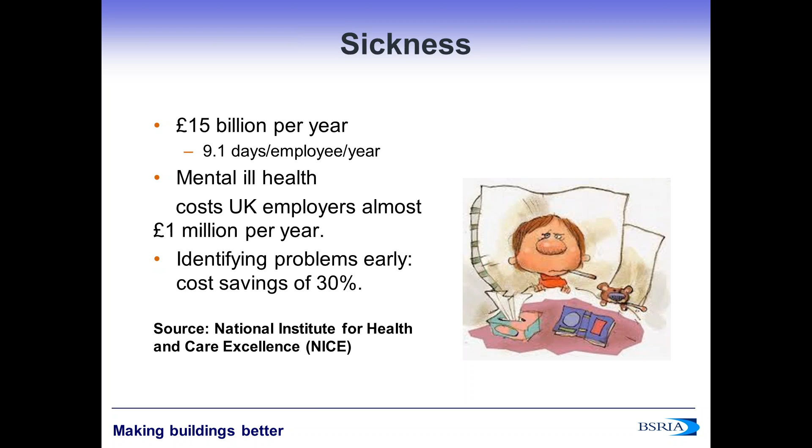From a construction point of view, well-being translates into creating buildings that provide the right environment for ensuring the well-being of its occupants. When we take into account people, building, and the environment inside the building, then we are talking about indoor environmental quality. IEQ, or well-being, should be in our minds at all the stages of a building, from design stage to construction to the maintenance stage of a building.

Although it's hard to quantify the economic impact for employers, it is easy to establish that the quality of a building can have a huge impact on the health and well-being of occupants. Now, when it comes to indoor environmental quality, we're talking about 5 main components, which are thermal comfort, light, indoor air quality, and odours, which also tend to go together, and sound comfort.

Let's start with light. Just as a brief reminder, when we have a source of light, the amount of light that it produces is measured in lumens, and this is called the luminous flux. The amount of lumens that hit a surface is called the illuminance, and illuminance is what we normally measure in a building, or what is normally in a building contract.

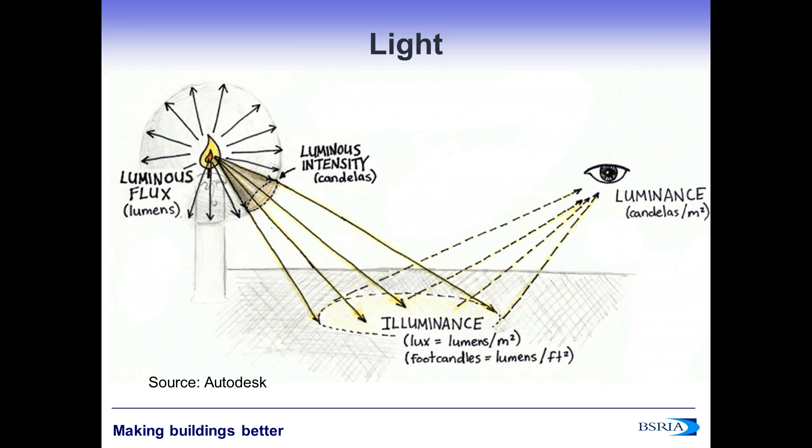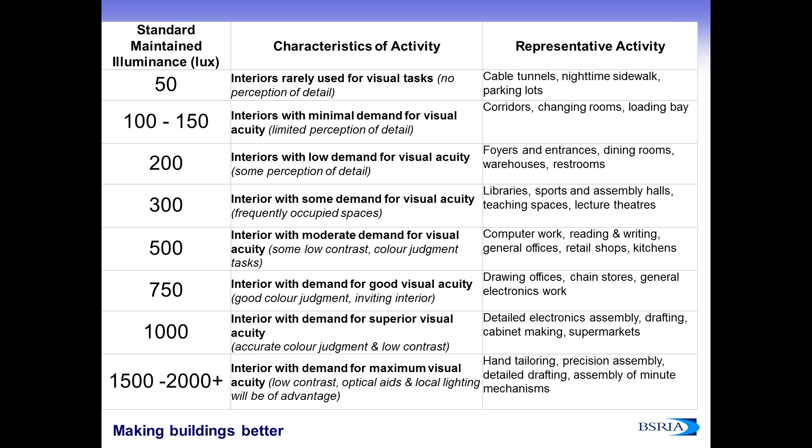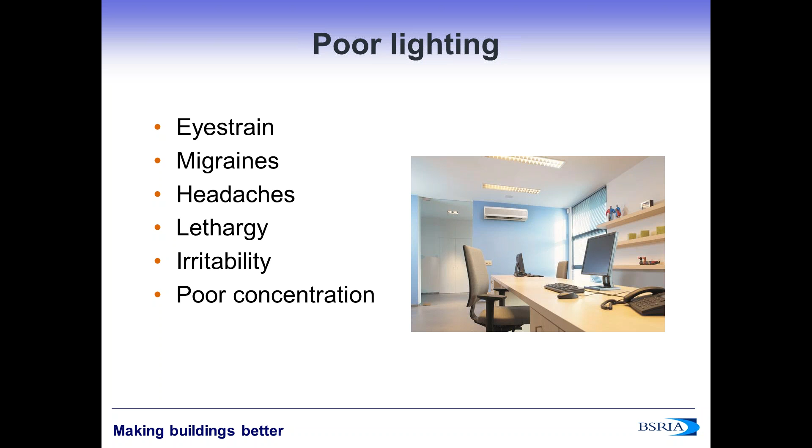Now, we all know what happens when we have to work with poor light. We might get headaches, we get irritable, and we cannot concentrate on the task that we're doing. So how does this affect our performance? Now, it's not only important to provide the right amount of lux, the right amount of illuminance. Good lighting with lack of glare, for example, is indispensable for occupants to be productive.

Some studies have also linked daylight, windows and views to increased levels of productivity. And we can also use light to our advantage, knowing that some types of light, such as blue light, make us more alert, and dim lights can make us more creative.

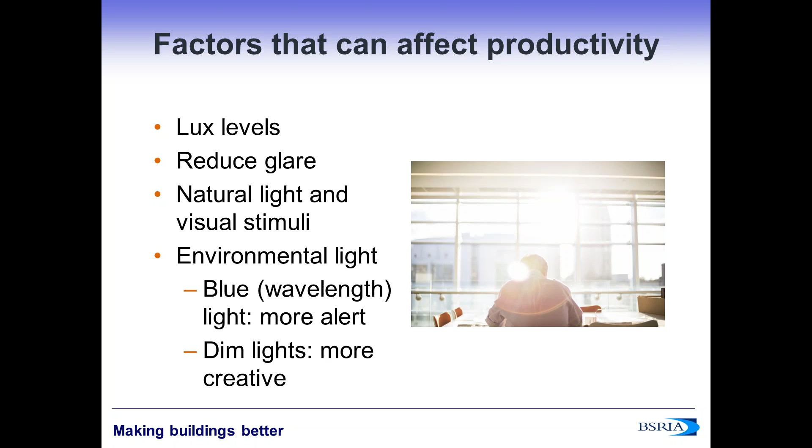Now, the next component of indoor environmental quality that we're going to talk about is sound comfort. I'm not going to talk in depth about sound, as my colleague Rebecca Hogg is already giving a presentation about sound on the 1st of March, which you can find online. And she is our acoustic expert. But very briefly, we can define sound as any air pressure variation that the human ear can detect, and noise as any unwanted sound.

Now, designing for the right noise levels can improve the satisfaction of the employees. High noise levels and vibration will result in a really uncomfortable environment. It can also cause hearing damage or stress, it can affect our motivation, and it can also be very distracting. On the other hand, very low noise levels, for example in an office, have an effect on our speech

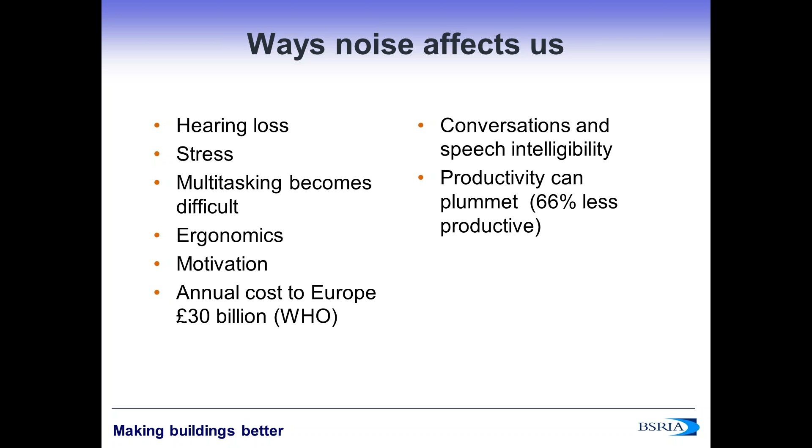privacy. In fact, in an office environment, we are not normally subjected to very high noise levels. But what distracts us is the fact that we can hear and understand other people's conversations, whether we want to or not.

And actually, the ISO standard 3382 defines two acoustic parameters, which are defined as distances. The first one is the privacy distance, which is the distance at which a conversation can no longer be understood. And the second one is the distraction distance, which is the distance where speech is only intelligible just a little, but it mostly contributes to the background noise.

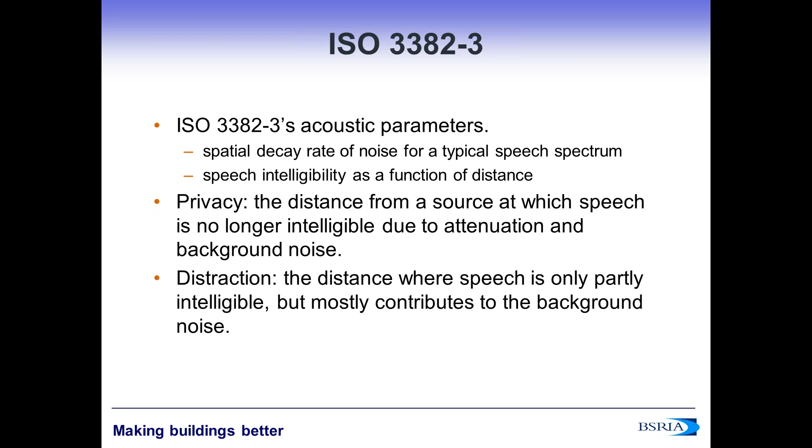Now, the next point that I'm going to talk about is thermal comfort. Thermal comfort does not only consist of measuring temperature and humidity levels and ensuring that they are in the adequate range of values. There are several standards; for example, in America, ASHRAE 55 is quite popular for measuring thermal comfort. But in the UK, BS EN ISO 7730 is the one that we normally use. And the other standard, 7726, refers to the instrumentation that we use for measuring thermal comfort.

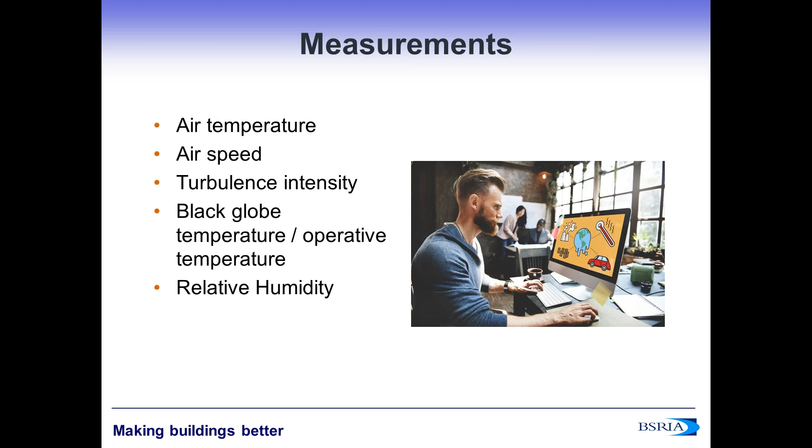For the measurements that we have to take for measuring thermal comfort, as I said before, they are not only temperature and humidity, but we also have to measure airspeed, turbulence intensity, and either black globe temperature or operative temperature. Here you can see some equipment that BSRIA uses for measuring thermal comfort. So here, for example, you have an anemometer, which measures the airspeed and also air temperature. Here you have a black globe, and here you have a humidity sensor.

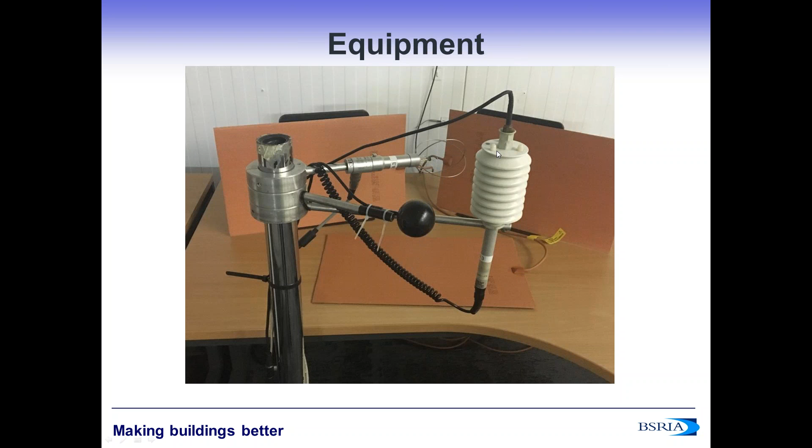Now, the standard takes into account all these parameters that we have measured, but it also takes into account the clothing levels and the metabolic rate. So the clothing levels will be different depending on the layers of clothes that we have. And the metabolic rate refers to the activity that we are doing. So for example, if we are designing a space for a gym, people there will probably be running or exercising, and their metabolic rate will be higher. So we have to take this into account.

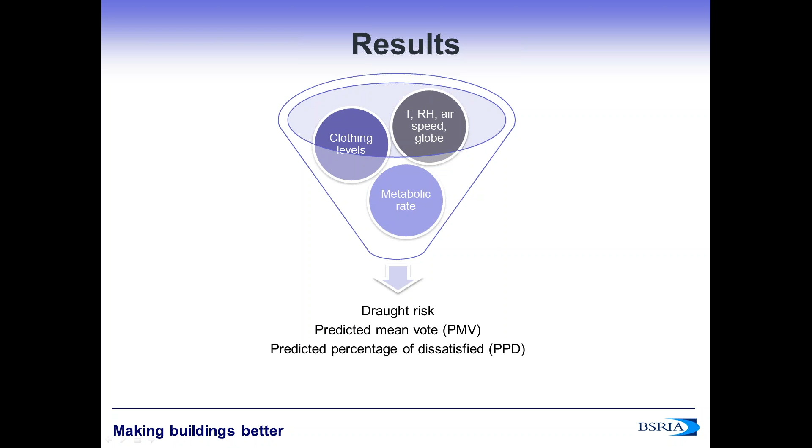And then with these three factors, we can calculate the draught risk, which is a percentage. It gives you the percentage of people that are going to be bothered by draught. The predicted mean vote and the predicted percentage of dissatisfied, I'm going to explain to you in the next slide.

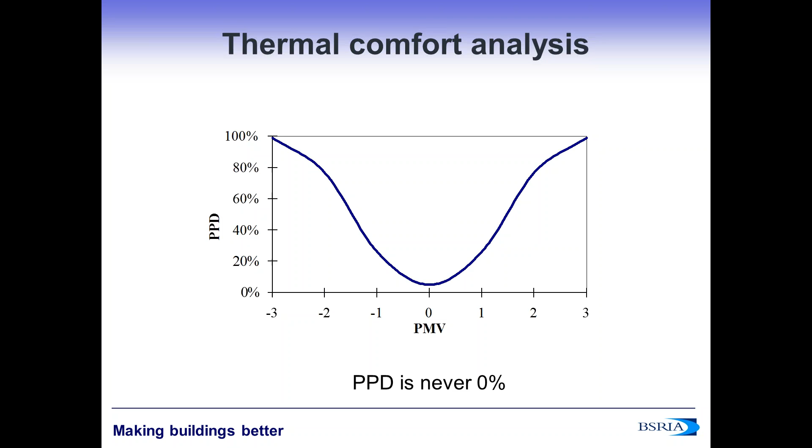Annex A of the standard 7730 that I mentioned before categorizes the buildings or the spaces depending on the results of the predicted percentage of dissatisfied people, the predicted mean vote, and the draught risk, as you can see there.

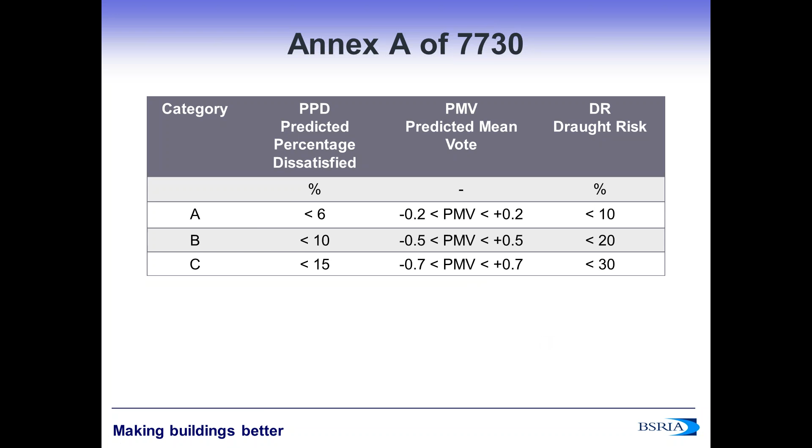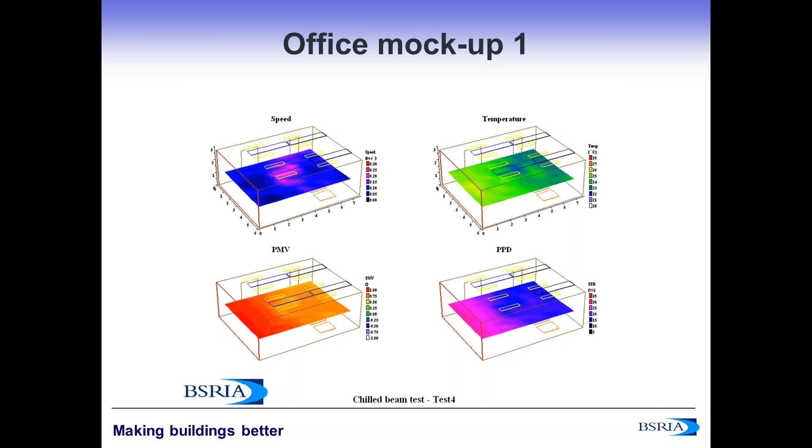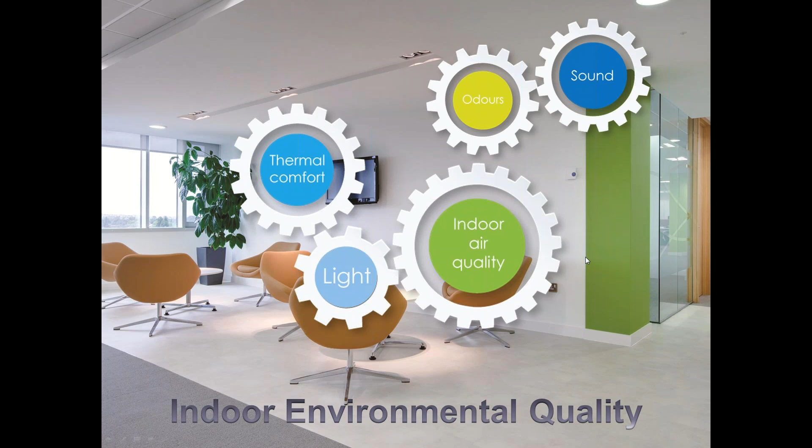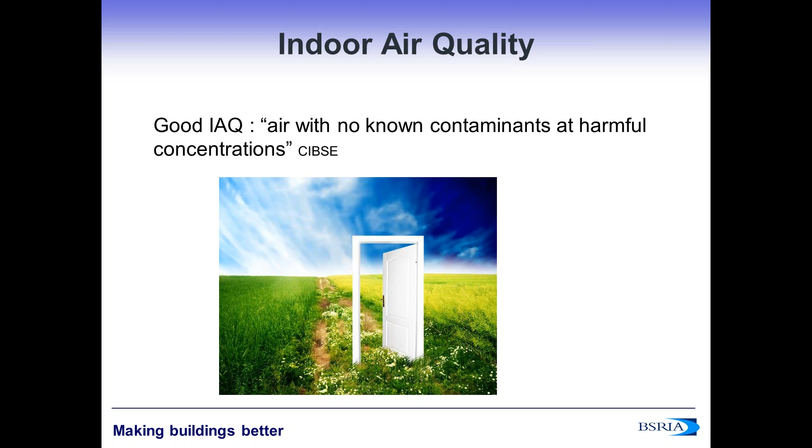The next point that I'm going to talk about is indoor air quality and odours, because most of the time they are related to each other. Now, to have good indoor air quality, we first need to define it, and I found this definition from CIBSE that I like very much: air with no known contaminants at harmful concentrations. This means that the air we breathe in is going to have some contaminants, but good indoor air quality is air whose contaminants will not be harmful for you.

Now, to have good indoor air quality, we have a few requirements. First of all, if we get fresh air from outside, it's actually fresh, and we haven't got high pollution outside. We also have to have low emissions from internal sources, for example from wall panels, carpets, glues, paints, or the photocopier, which sometimes produces ozone. And we have to have a good level of ventilation to dilute and remove these pollutants.

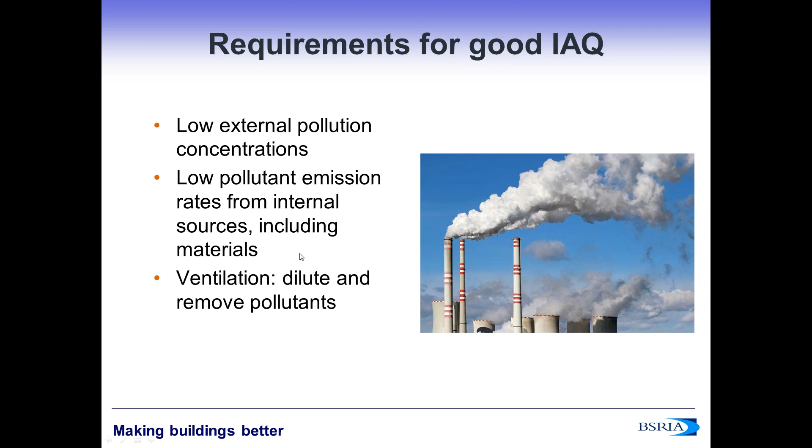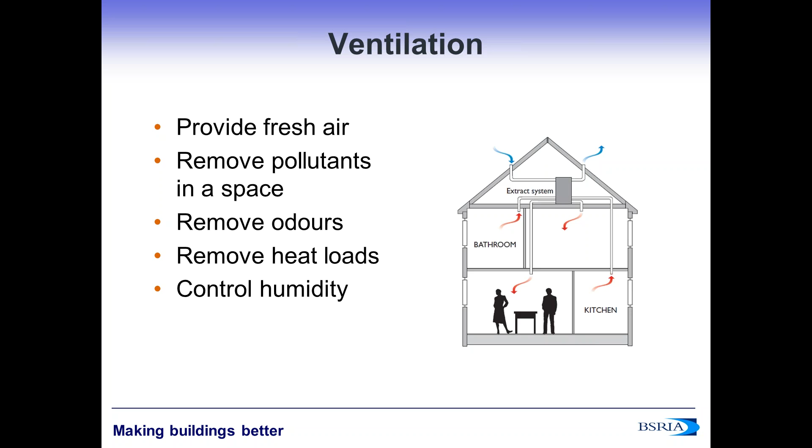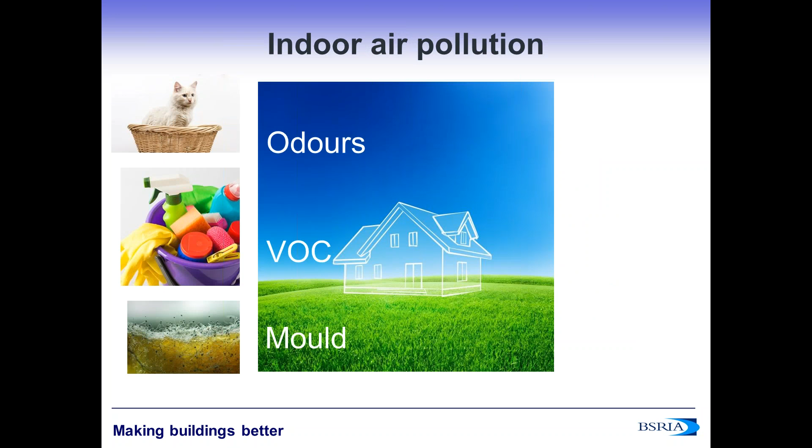As I mentioned before, the role of ventilation in a space is to provide fresh air to the occupants, to remove or dilute pollutants, and to remove odours and heat loads. But it's also very important to have good ventilation to control humidity. Because this is not a presentation about indoor air quality, I'm going to summarize the main contaminants of indoor air pollution, and if anyone is interested, I can give more information later. Basically, we have five: odours, VOCs, mould, particulates, and gases.

Now, particulates are very fine dust particles, some of which can be external. They can come from traffic, from tobacco, or from the atmosphere, because sometimes even in the UK we get dust from the Sahara Desert. And they can cause a series of problems to people, from lung irritation to asthma or rhinitis. With particles and all the other respiratory contaminants, the smaller they are, the deeper they can go into our lungs, and some gaseous contaminants can even get into our bloodstream.

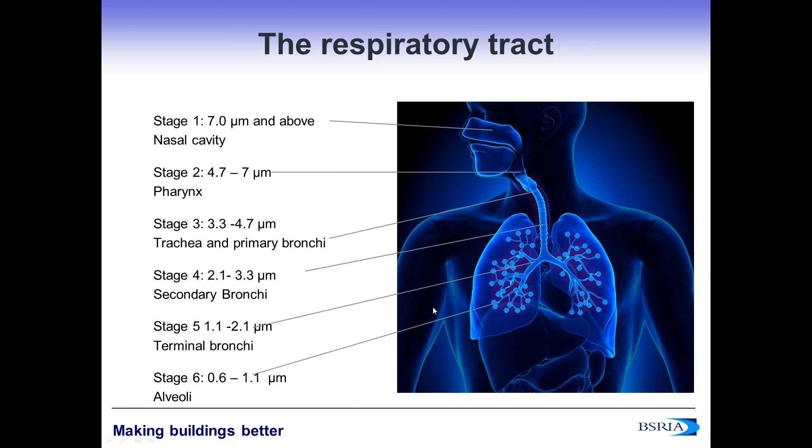When it comes to gaseous pollutants, we have a very large range that we're not going to go into in this presentation, and they can cause a series of troubles to your health. For example, CO2 can cause dizziness at very high levels. At extremely high levels it can cause death, but we're talking about maybe 10,000 ppm. CO, carbon monoxide, on the other hand, can kill you at very low concentrations, maybe 30 ppm, because when we breathe it in, it binds with blood haemoglobin, creating carboxyhaemoglobin, which doesn't let the blood transport oxygen into the cells or get rid of CO2 from the cells.

We have other contaminants that occur naturally, for example radon. Radon occurs naturally and can be found in rocks, and it's radioactive, so it can increase the risk of lung cancer, for example.

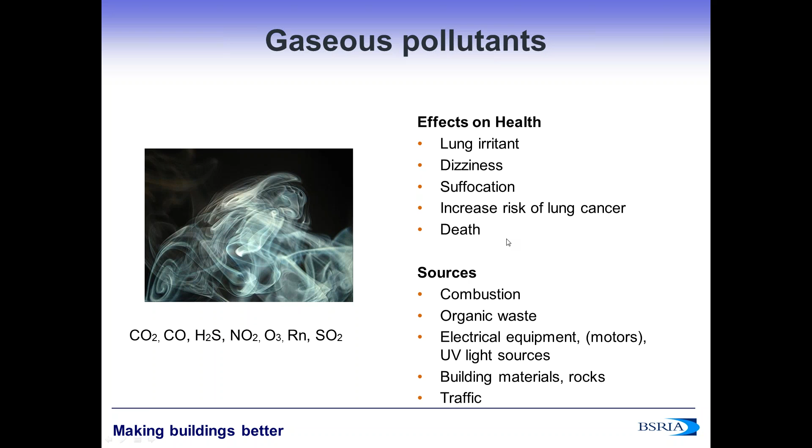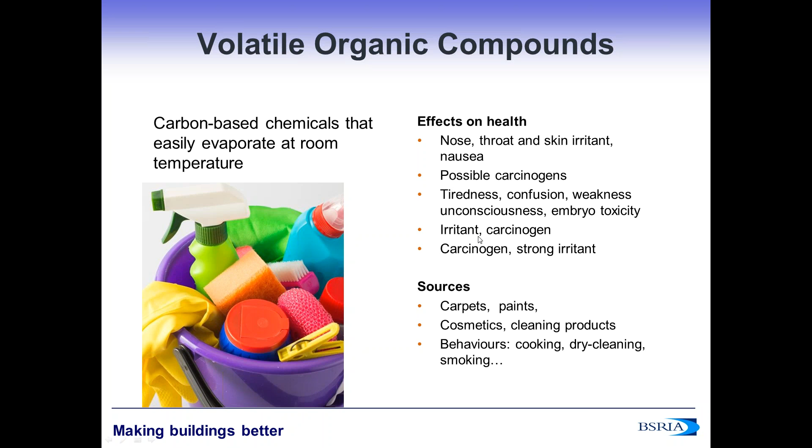Then we have volatile organic compounds, carbon-based chemicals that can evaporate at room temperature, and we see them all the time: in cleaning products, bleach, paints, carpets, glues, or when we paint our nails or remove the polish. The effects on health are very varied depending on the contaminant and the concentration. Some of them are possible carcinogens, for example tetrachloroethylene, which was used in dry cleaners and has therefore been forbidden, whereas others can just be a bit irritating to your breathing system.

The next contaminant I'm going to talk about briefly is mould. Mould produces spores that float in the air, land on surfaces, and grow, and it can cause anything from sneezing to asthma attacks. Normally we have mould in buildings, especially in homes, because of showering, breathing, washing, and cooking, and the key to keeping it under control is ventilation.

Finally, I mentioned that I was going to talk about odours and indoor air quality together, and it's mostly because these two aspects go hand in hand. It is very difficult to quantify odours, sometimes because humans get used to their environment, and it's mostly when we walk into a space that we notice any smells, not when we have been there for a while.

But Fanger quantified odour emissions, and he defined the OLF, which is the rate at which a normal adult who is wearing deodorant but no perfume and has had a shower emits air pollutants. And he also defined a decipol, which is, if we put this person that is emitting 1 OLF of pollutants in a space that is ventilated, how the air quality in this space would be perceived.

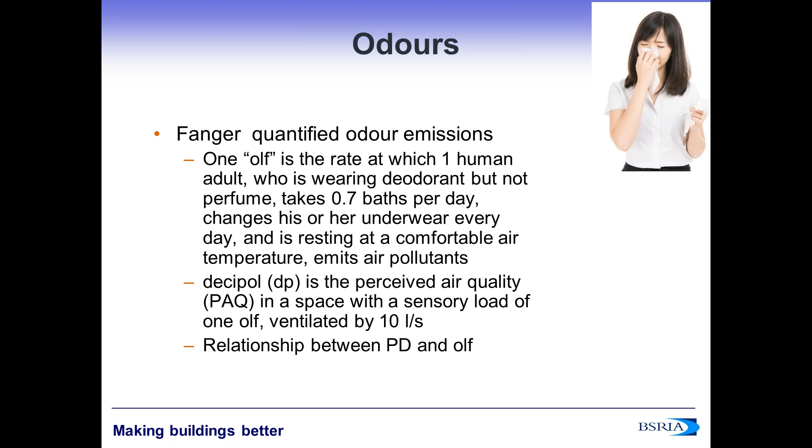Just note that I'm talking about fresh air. So for example, if we live in a very contaminated city, it would be a good idea to have a good air handling unit with filters that we change regularly so that we are actually providing fresh air and not external air to occupants. We should also design for the right levels of fresh air per person that is going to occupy the building, which at the moment is 10 liters per second.

But inside a building, we can reduce the sources of emissions. We can use painting materials that do not emit a high level of VOCs. We can use carpet glues that also don't emit a high level of VOCs. And if we try to control the sources of emissions, we will have a better indoor air quality.

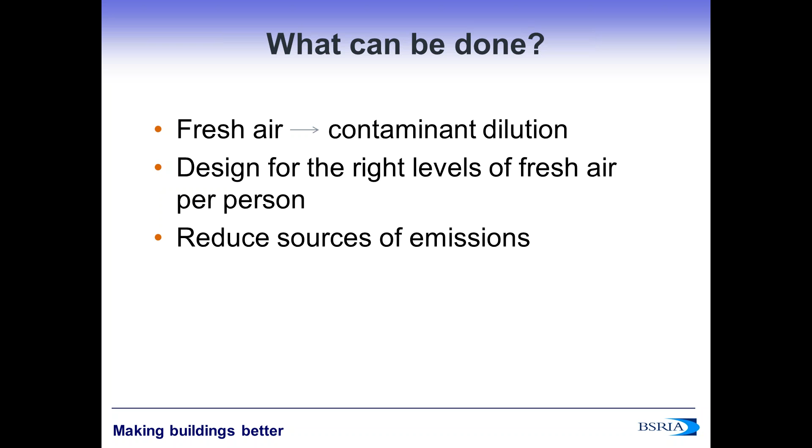Now, these are the aspects that I have talked about: thermal comfort, light, sound, indoor air quality, and odours. But in addition to these 5 aspects, some authors and some well-building standards also take into account other aspects. For example, water. Water quality refers to the characteristics of water intended for human consumption, and the quality of water at any point should be compliant with the European Directive 98/83, which deals with drinking water.

Other aspects that are taken into account are, for example, location, amenities, the views that the building has, the biophilia, or the love for the trees and nature, and some standards also consider nutrition, or providing good healthy food to employees, and also the aesthetics: the interior layout and the look of the internal office space and furnishings.

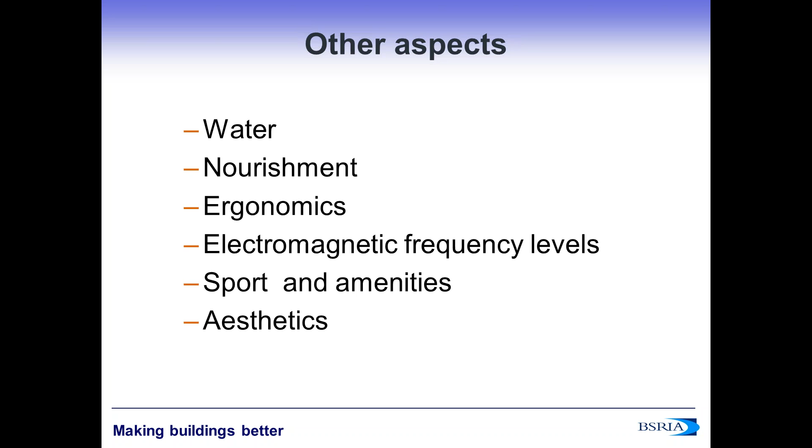Finally, to sum up this presentation, I would like to say that what we have seen today is that well-being is made up of 4 elements: mental and physical health, social well-being, and work well-being. We have illustrated how buildings can affect our well-being. And finally, we have demonstrated that indoor environmental quality can improve the productivity, concentration, and creativity of people. So to conclude, I would like you to think about the benefits that indoor environmental quality can bring to your workplaces and homes. Thank you very much.